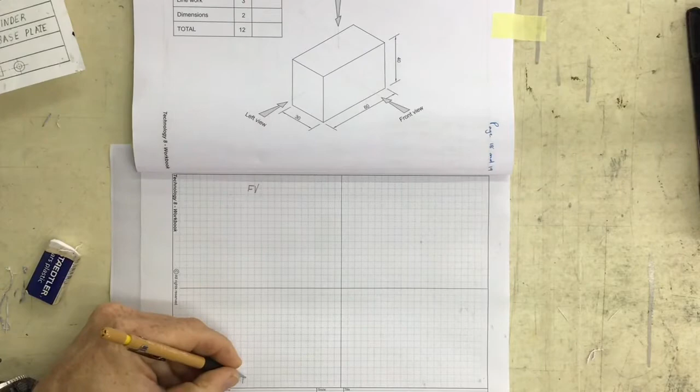All right, we're going to look at doing this first angle orthographic projection. That means I'm going to have a front view in this block over here, a top view in this block over here, and a left view in that block over there.

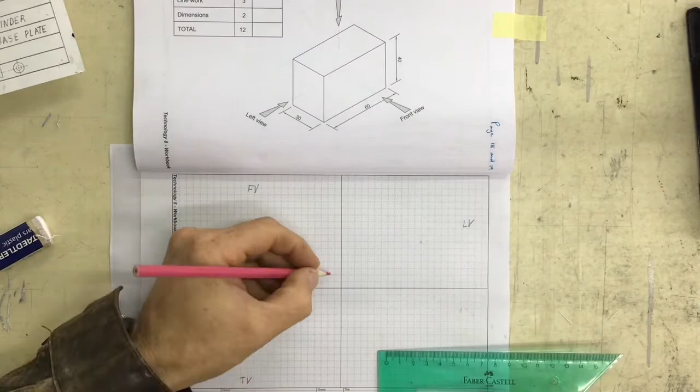Let's start out, and I'm going to count up 2 blocks over here and draw a construction line going across like that. Then I'm going to measure 2 blocks across and put a little V on that block, and from that V, I'm going to measure this length over here.

You can see the length over there, and it says that it is 60 millimeters. So I come along with my ruler and measure off 60 millimeters with a little arrow like that. You'll find it much more accurate than making a big blob.

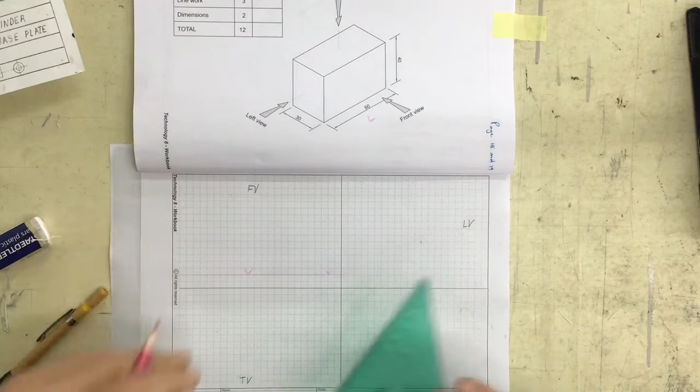Once I've done that, I'm going to draw 2 construction lines going straight up from the bottom over here, and you'll see why I've got that going all the way from the bottom, and another construction line going up over here. Those are construction lines, very, very light lines.

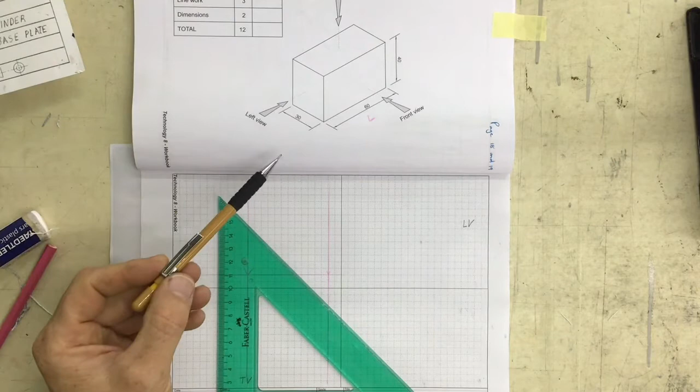I'm going to draw a construction line with a pencil so you can see how to draw those lines. I'm holding the pencil at the back and I just drag it down, leaving a very faint line on the drawing. I'm drawing it in color so you can see the construction lines more clearly, but they are very light lines.

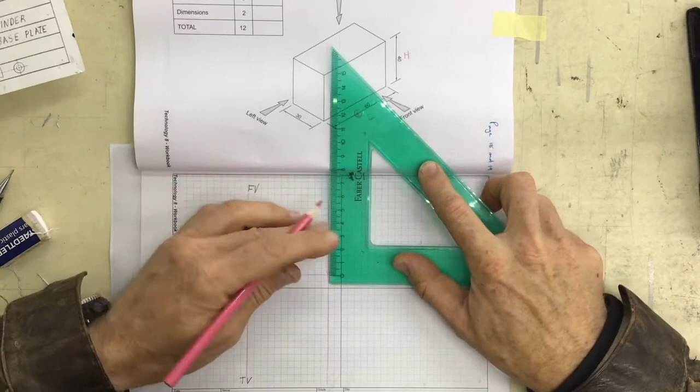The next thing is to get the height of it. You can see the height over there, it says 40 millimeters. I measure with my ruler and make a little V where it says 40. Then I come up here and draw a construction line going all the way across from the left view, and I'll do the same thing over here. So I've got the length and the height over there.

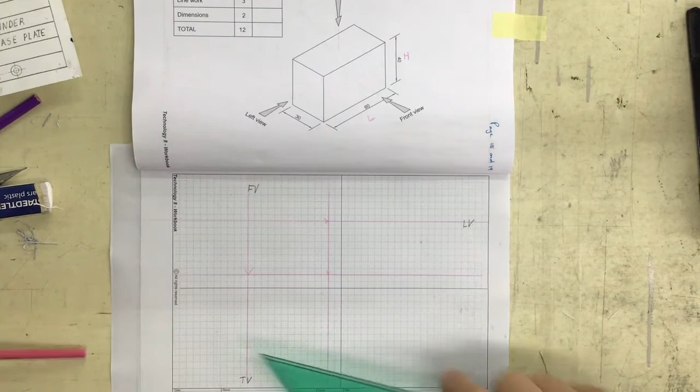After that, I take my pencil and darken that in, nice dark lines going across like that, and nice dark lines coming down like that. What you could do for me is just put in length and height over there.

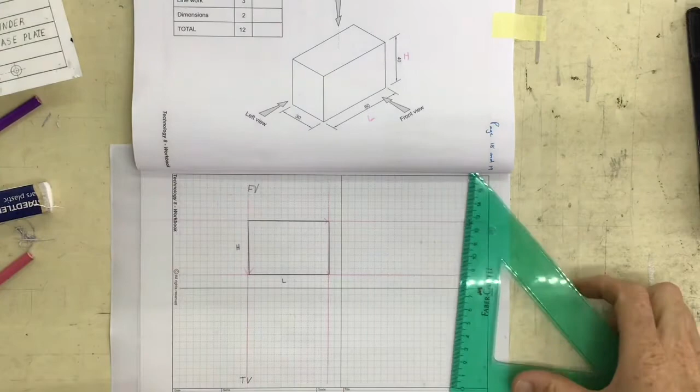All right, the next view is my top view. Now my top view has got exactly the same length as my front view, and that's where these construction lines coming down here are going to help. I can now come in over here and draw a construction line coming across.

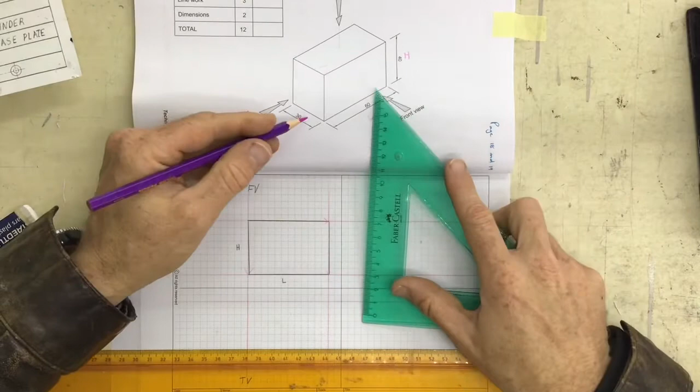I'm going to measure down, it says 30 millimeters in the width. See the width over there? I come over here and measure 30 millimeters down, draw a little V, then come to this side, draw the same little V at 30 millimeters, link those V's up, and draw a construction line going all the way across the page.

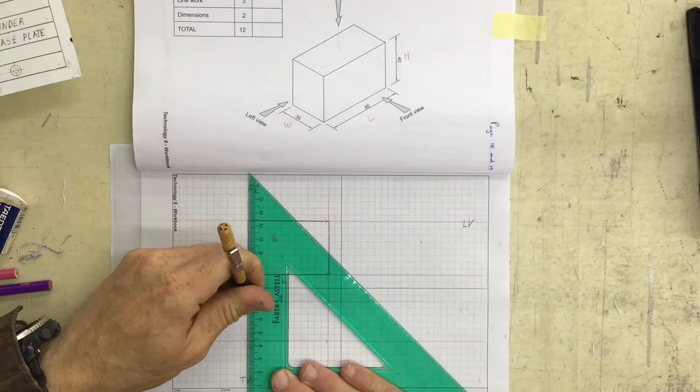Once I've done that, I come in here with my ruler and draw a nice dark line coming down there, another nice dark line coming down there, and a nice dark line going across, again over here across. Right, the next thing is to get this left view.

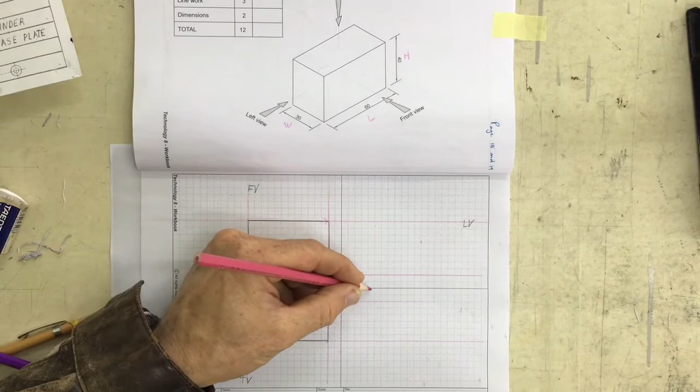Now, I don't like counting blocks or measuring, so I'm going to try another method. What I'm going to do here is count down 10 blocks and count across 10 blocks. With that, I'm going to draw a line coming down over here, and a line going across over here.

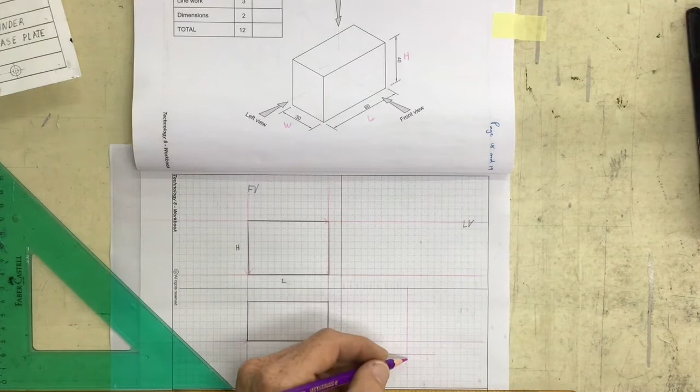Once we've got that, I've drawn a line coming across here and a line coming down here, so 10 blocks down, 10 blocks across, getting me that point over there.

If I take this set square of mine, it's a 45-degree set square, and I draw a line coming down over here. Once you've got that in place, it's very easy to take the measurements from this across, and where it cuts over that 45, I take a line going straight up. And where this line comes across and cuts over the 45, I take that straight up.

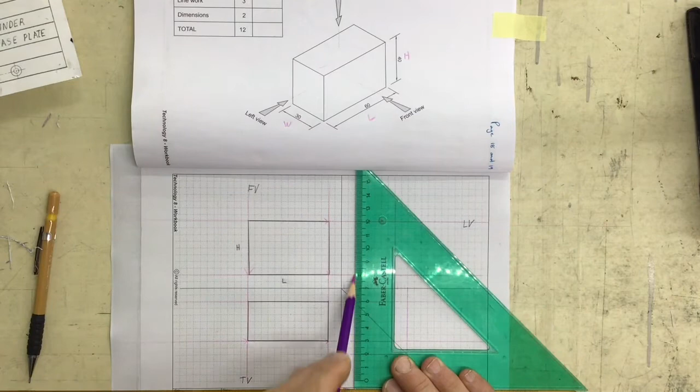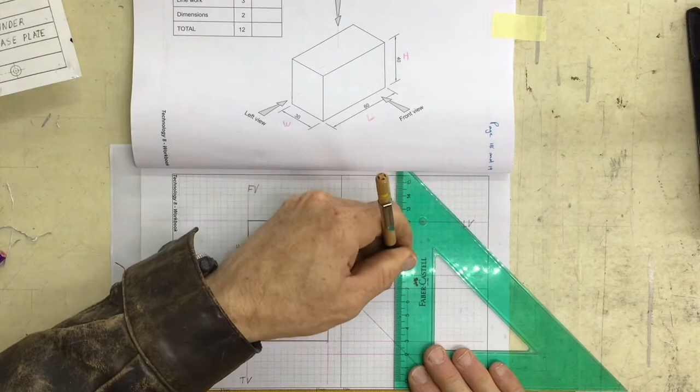Now, what 2 measurements do I need in my left view? I need the width and the height. You can see the width being projected across and up into that view, and I've got the height coming across over there, which means I can draw in the left view straight away by drawing a line coming down there, another line coming down there, a line coming across there, and a line coming across there.

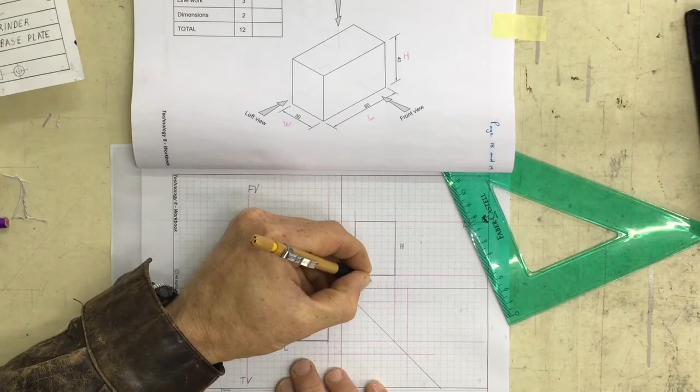Now what I'd like you to do with this view is write in length over there and width over there. In this view, I want you to write in height over there and width over there. So you've got length, breadth, and height, or length, width, height.